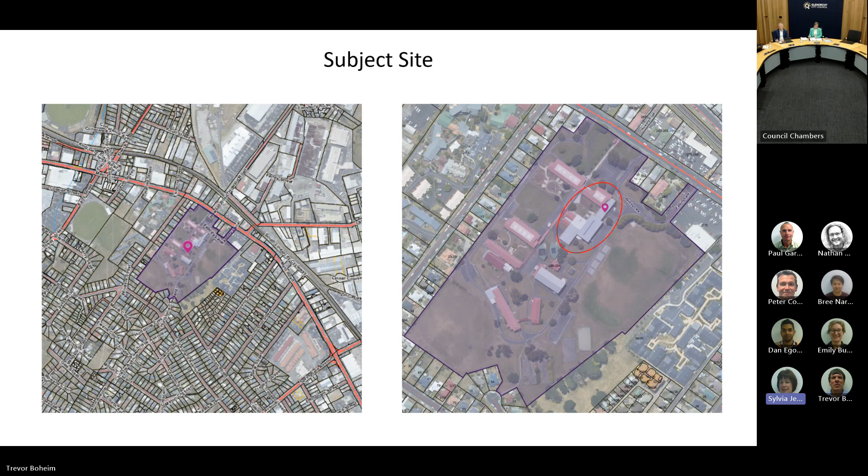So the proposed development will go on the left-hand side where there's a flat roof at the existing building.

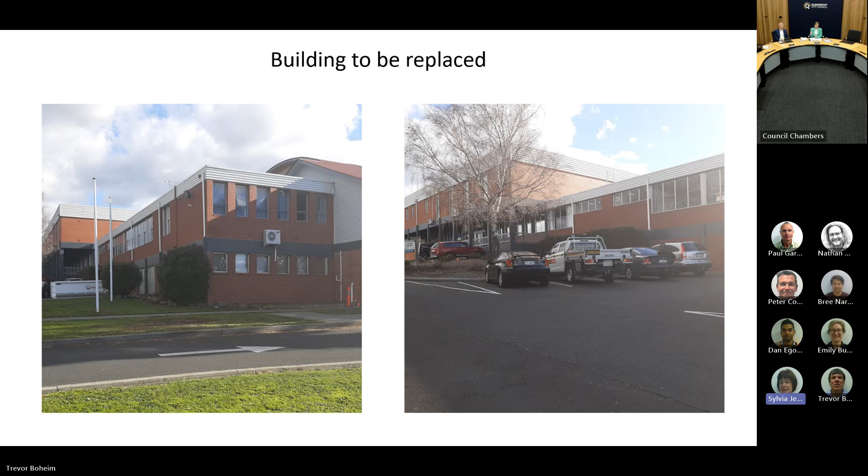Next slide, please. So this shows the building that will be replaced. This building will be demolished - that's K block and part of H block. Next slide, please.

There are also on the left-hand side 2 buildings, in association with J block, that will be demolished. The picture on the right-hand side shows the existing bus stop, which will be demolished and replaced with a new one.

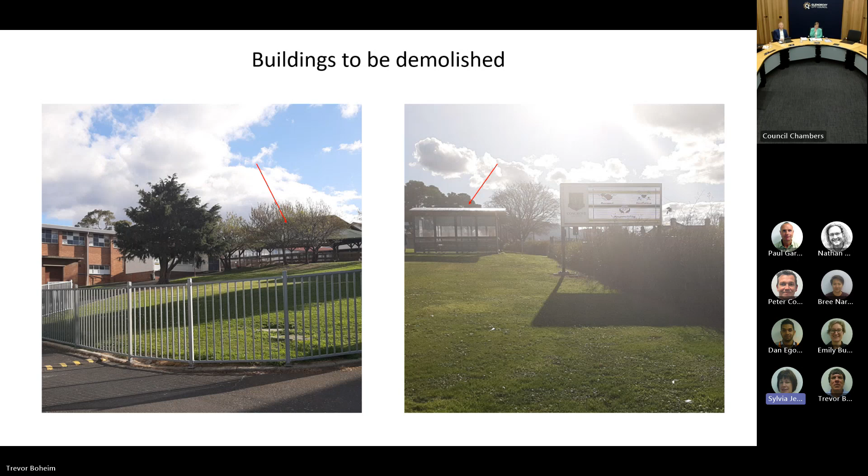Next slide, please. And here you can see the building in more detail. On the top of the page, you can see how the new building will fit in with the existing building when they are viewed from Main Road.

You'll see on the left-hand side, that's what you can see when you're looking from Main Road. The proposed building has got a height discretion, so you will note how the rooftop will fit in with the existing buildings - it's only marginally taller than the existing buildings when viewed from the front.

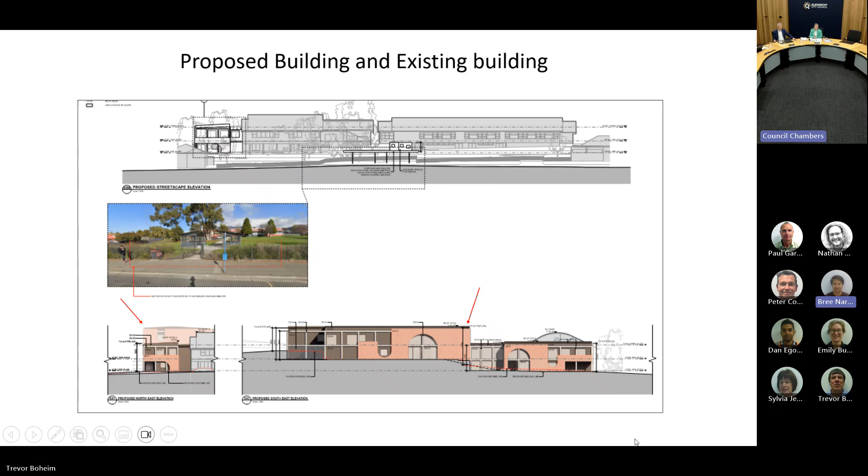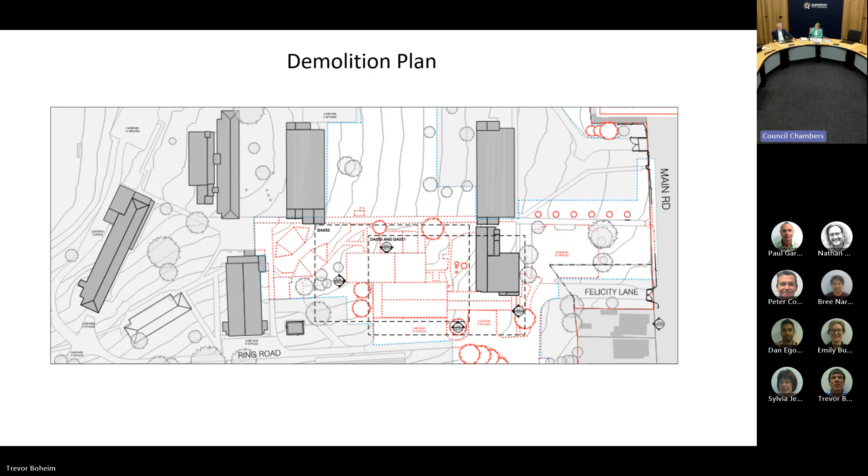Bree, is that currently the case? Maybe if we can go to the plans - I'm not sure if I follow, which access do you mean, from the main road access, as you turn out? Because it's only one way in and one way out. That's right, but you have to turn left onto the main road.

All right, any further questions or discussion? No? Well, we don't have the applicant here and there are no representations, so we'll move on to the recommendation before us, which is for approval - that a permit be granted, subject to 7 conditions. Do I have someone to move that? Moved Alderman King, seconded Alderman Cockshut.

Any discussion, Alderman King? It's probably high time there are upgrades to the school - it looked that old when I was young, so if that's possible. I think it's a good thing. I hope they get the student level up again, because the last few principals have worked really hard on the school - and that's nothing to do with planning, but they've worked hard to improve the school, the reputation, the feel, the vibe. So I think new buildings will help with that as well. I don't think it's wasted money. Thank you.

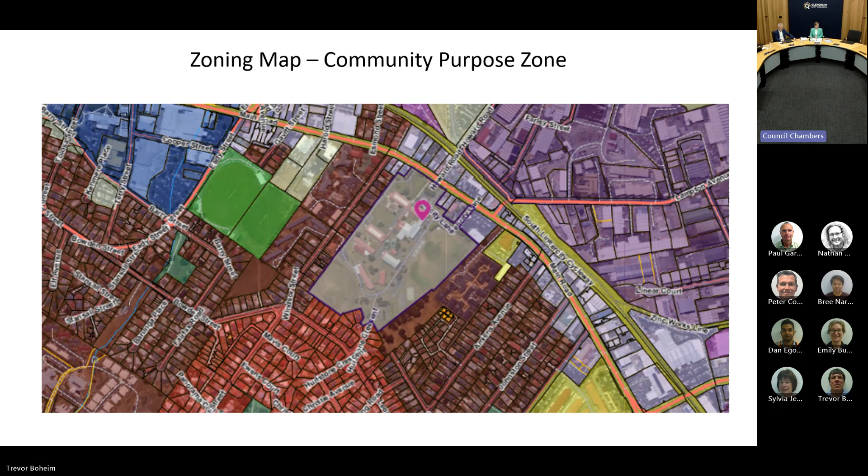Thank you. Moving on to item 6, proposed use and development, multiple dwellings, residential, 28 Montrose Road, and Peter is presenting to us. So over to you, Peter. Thank you.

Go to the next one, please. The proposal may well be familiar to you. It wasn't all that long that we looked at something rather similar. 28 Montrose Road for an additional dwelling in the backyard.

Next one, please. The existing dwelling has 4 bedrooms. The proposal similarly is for 4, both to be 2 stories. The setback for the proposed is about 2.8 metres from the rear boundary, 2.5 from the side to the west, and 3.39 from the side to the east. The proposal is discretionary for the density standard, the setback and building envelope standard, site coverage and private open space standard, privacy standard, and the standard for car parking numbers.

The site is at the north of Montrose Road. For the purposes of assessing the residential density standard, I highlighted what I consider to be the area which we've got to have consideration for when looking at density, being those properties to the north of Philip Avenue and to the north of Tilyard Street and bound by Main Road.

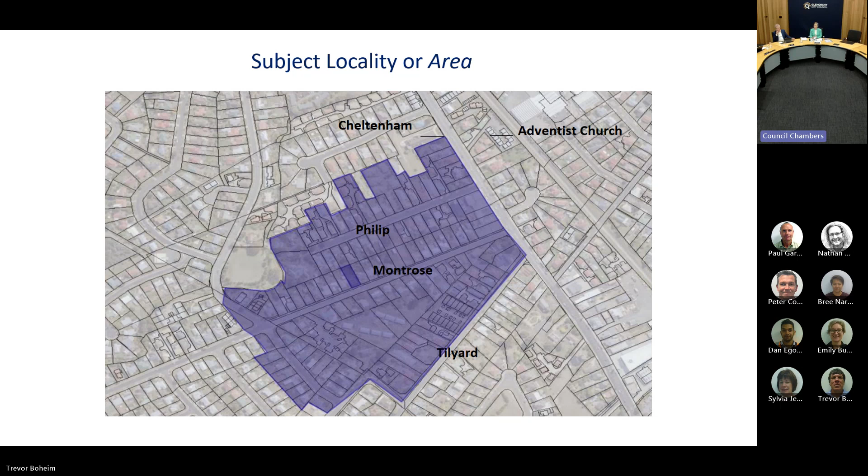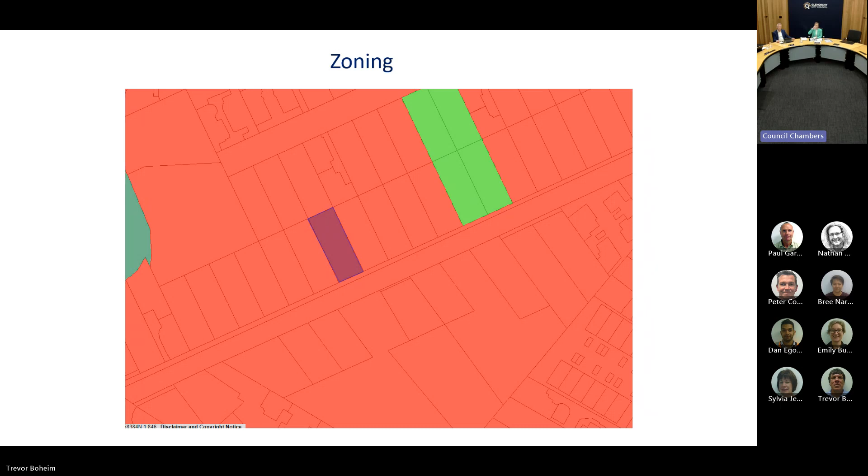Go to the next one. And the property is in the general residential zone, and there's a bit of recreation zone over the tennis court in Montrose Road. Next one.

So this is the location of the existing dwelling on the north side of Montrose Road, within the vicinity of other single detached dwellings.

As I said, the proposal is somewhat or largely similar to a previous application, the PLN of which was PLN 22452, and that was refused in November of 2022 on the grounds of residential density and the building envelope standard. Subsequent to that refusal, the applicant, keen to progress, wanted to see what they could do in order to get to an approval, and so we've worked with them somewhat to get the proposal into a better standard.

If we go to the next one, please. This is the area where the proposal is to be built. I think importantly with this image is the vegetation at the northern boundary, which separates that property from the other property at 39 Philip Avenue, I think it was, which part of the building envelope protrusion goes toward. But with that vegetation, it would be largely invisible, and the dwelling at that property in Philip Avenue is many metres away on the other side.

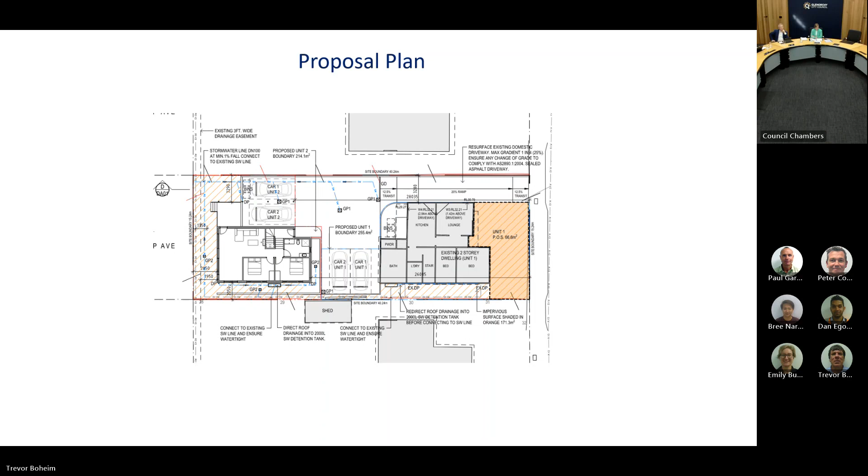So that's it for the development standards.

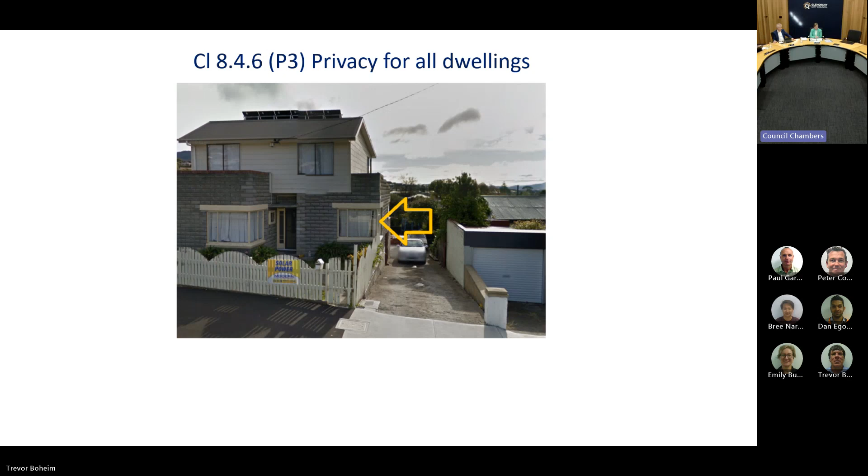So that concludes the development standards for the zone, and moving to the last discretionary item for consideration, which is the absence of a visitor car parking space.

The proposal does include 2 car parking spaces per dwelling. The table for the acceptable solution requires 1 per 4 and clearly says rounded up. So the requirement for 0.5 of a visitor space rounded up equals 1 whole visitor space, which isn't provided for.

But our engineer is quite satisfied that Montrose Road is able to have a visitor space accommodated on the street, which is often the case, especially where visitors are more intermittent than if a person's relying on the street for their dwelling vehicle. Even if a person had a visitor space, it may be that visitors are going to park on the street out of ease, so I think most of our streets are capable of doing that.

But if you have other questions relating to that, perhaps the engineer could speak to that.

So having covered the zone and the code standards, the proposal was referred to our engineer, who has determined that it does indeed comply with respect to grades and that sort of thing. Waste services were involved and they've indicated that it's able to be supported and that they'll allocate the appropriate number of bins. The proposal was advertised for the statutory 14-day period.

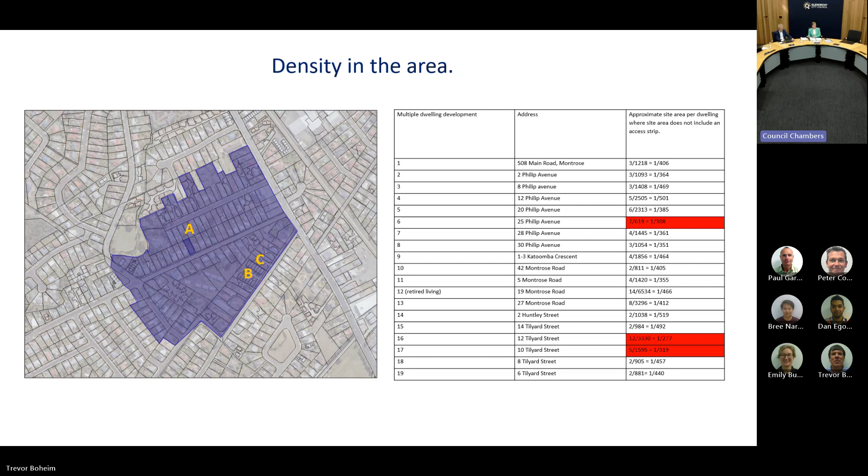Moving on to item 7, proposed use and development, multiple dwellings, 76, and visitor accommodation unit, including works at 43 Russell Road, Claremont. Trevor, are you presenting? Thank you, Trevor.

I'll just mention at the opening that this assessment was undertaken by Grace Paisley, and Grace is offline doing some other work for us at the moment in relation to new software. Therefore I'll present this report on her behalf today, and I acknowledge the work that she's actually done on this report.

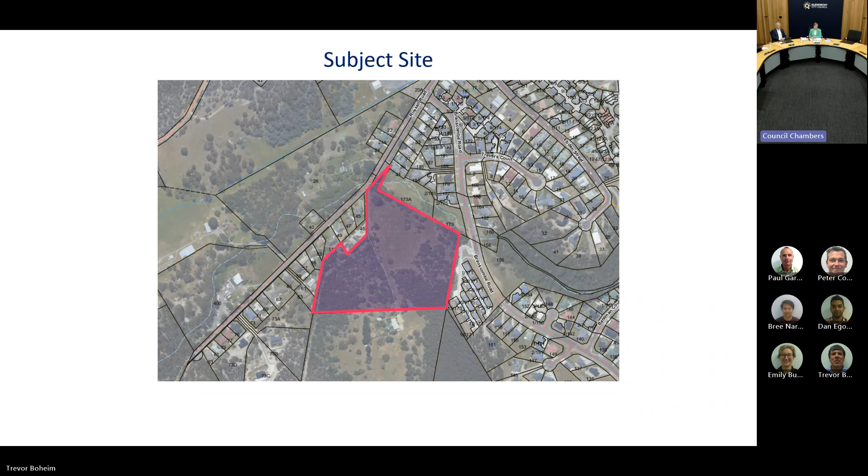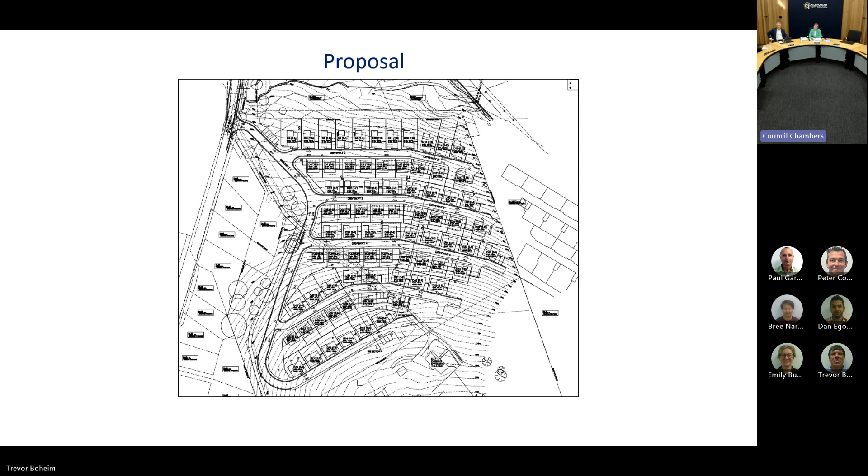The proposal is to construct 76 dwellings on the site. This is the site plan. It's a little difficult to read on the screen, but at its correct size it's much easier to read. We can see a number of rows of detached units, with some attached towards the south of the site, but predominantly detached, running east-west across the site. There are 5 internal driveways running east-west and a main driveway along the eastern side. The units are located up the hill because the land slopes from top to bottom, taking advantage of the hill and the views out towards the Derwent River.

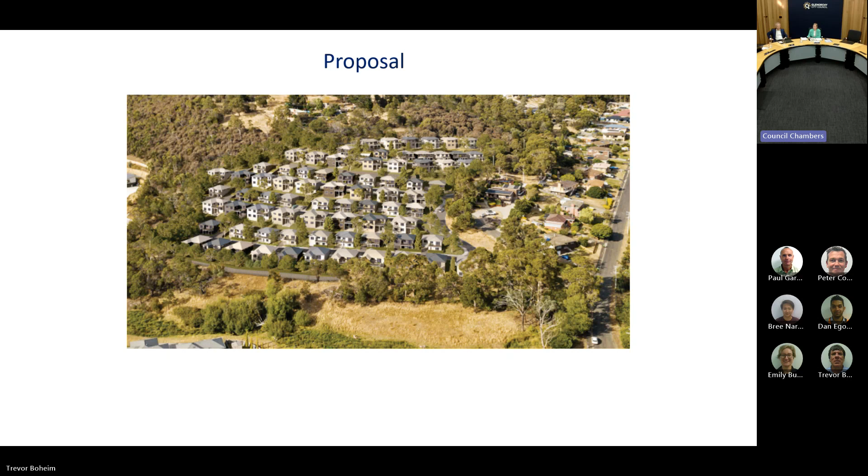The proponent has also provided a number of drawings of what the development would look like. These don't form part of the plans that we would be approving here today, but do provide a good indication of what the quality, the form and the nature of the development would be.

That roadway we see in the foreground is actually an internal road. It would not be a council asset, but would be managed as part of the development. What we can see there is a number of detached single dwellings taking advantage of the slope to provide a second story at the lower level and more room at the upper levels.

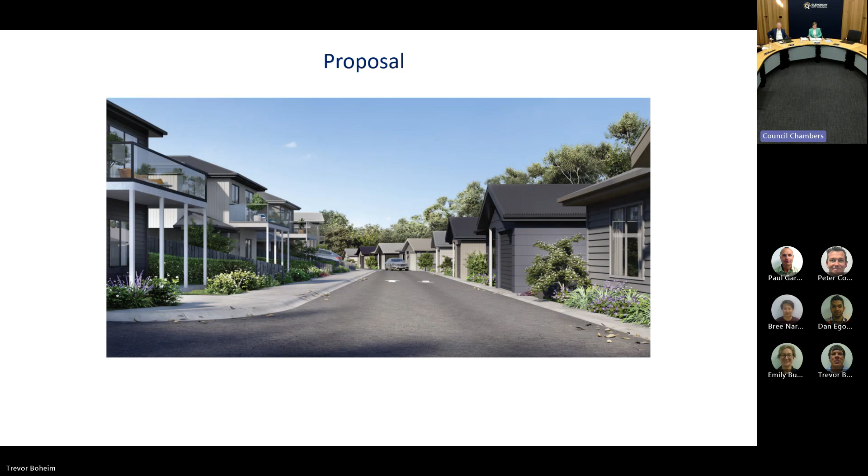Here again is an indication of what the development would look like. We see on the left-hand side the dwellings on the upper part of the slope, and on the right-hand side the dwellings on the lower part of the slope. We can also see one of the two-way driveways that services the proposed units within this development.

The development had a number of discretions, and I'll go through them fairly quickly. The first relates to site coverage and private open space, although it wasn't site coverage that created the discretion, it was the private open space. For several of the dwellings, not all of the private open space is provided in one location, which is required by the acceptable solution. A number of dwellings have the private open space provided in a combination of the balcony and the courtyard.

This has been assessed by the planning officer and determined to satisfy the performance criteria despite not being in a single location. The second discretion relates to privacy, arising from the fact that some balconies and car parking spaces overlook other dwellings or the private open space of those dwellings. This has, however, been addressed through screening, the design of the units and the separation of the units, so the performance criteria has been satisfied with respect to privacy.

The third discretion is a discretionary use under the landscape conservation zone, clause 23.3.3. In this instance, the discretionary use is the visitor accommodation. It's considered the performance criteria is satisfied because we're dealing with an existing building, so it's not as if there is further development within the landscape conservation zone, and the building is considered compatible with the landscape values. We're not dealing with any new buildings here, but merely a change of use of an existing dwelling to visitor accommodation, which gives us comfort that the provision is satisfied quite clearly.

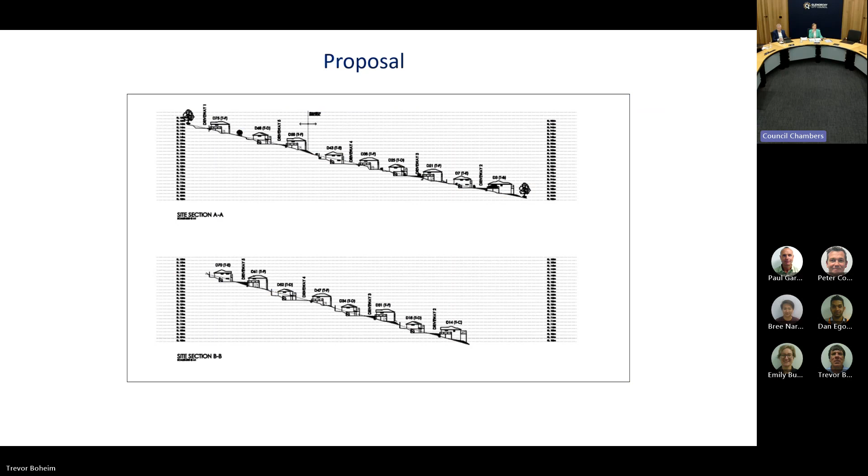Any further discussion? Alderman King: Thank you, Mayor. Look, I always get nervous at development this size, particularly with the other developments around that. Having grown up in that area where it was all bush, but development's good in this sense, like what you actually said. I appreciate that. I appreciate the in-depth discussion we've had and the explanations around everything. It is what it is. I think well done to all and sundry.

Thank you, Alderman King. Alderman Cockshott, any further discussion? Just echo my fellow alderman's thoughts. It's good to see, and particularly with the amount of dwellings in the area, particularly with the housing crisis. So I'm looking forward to seeing how it progresses.

Thank you. I appreciate the effort put into this report to us. Again, it is a very comprehensive report. It's been a significant process, I imagine, for both the applicant and council officers to assess such a significant development. Too, like my fellow elected members, welcome development in our municipality, that does demonstrate it complies with the planning scheme, and certainly that's what we've heard from the presentation this afternoon.

We've seen from the report that we've received that the discretions we have to consider in relation to this application, certainly that the performance criteria have been met in relation to those discretions. So I look forward to seeing this development progress. Sounds like we are supportive of it around the table here, providing for 76 new dwellings, roofs over people's heads. They are 2 and 3 bedroom developments. So they will house certainly a significant number of people and families. So I look forward to seeing the development progress should we approve it when we put the motion to the vote.